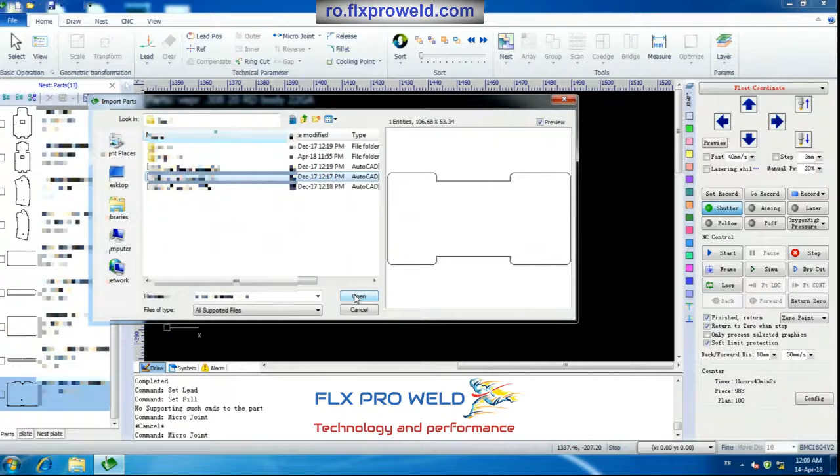So we have this part over here. That's what we want. We hit open. Now, I've already done this a bunch of times. This whole sidebar is full of components. So now we're going to right-click on our part and click Edit Parts. Now here's where we're going to start setting up the component.

So the first thing we're going to do is select whatever we want to edit. These top icons up here are only going to have effect on whatever's selected. So if you only want to do, say, certain geometry, like holes inside, you want compensated or different leads, then say outside geometry, just select what you want and then select the outside to edit that part.

So first thing we're going to go ahead and do is hit compensate. Now I'm going to show you how to calculate this in another video. Basically, you just cut a square of a known size, measure it, and then add on half the amount that it is different. I'm going to check all expand.

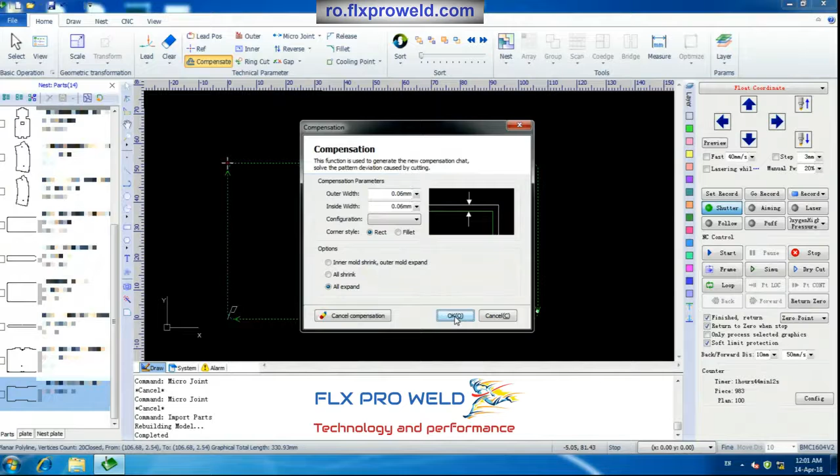You can do inner mold shrink, outer mold expand, but for certain configurations of the way I do things, that doesn't work. So I select either expand or shrink depending on what I'm doing. So outer geometry, we expand. Hit OK. And as you can see, it has now drawn a second line at an offset distance that I determined. And that white line is where the center of the laser beam is going to travel, and this is going to be the edge of what gets cut.

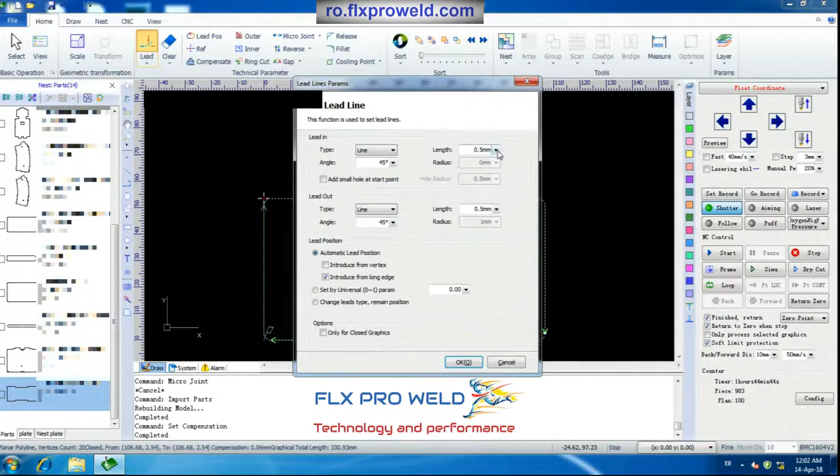So the next thing we're going to do, we're going to set up our leads. Now I got kind of this funny recipe I like. I use lead in line, 45 degree, 0.5 millimeter length, and lead out. We hit OK, and we're going to change the lead position. So that's this button here, and we're going to select right here.

Now if you look, I've got these 45 lines going out. What we're going to do is select inner. That's going to flip it. Now if you had set your compensation up to automatically find inner and outer, it would flip your compensation, which is why I tell it specifically to expand the compensation instead of letting it figure it out on its own.

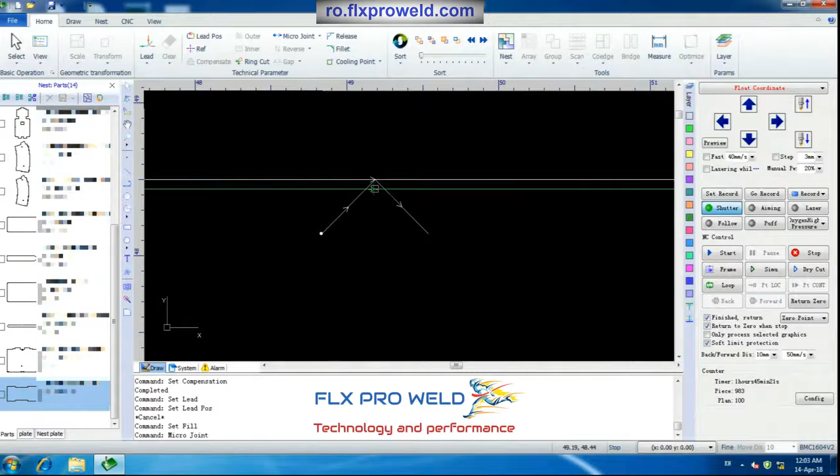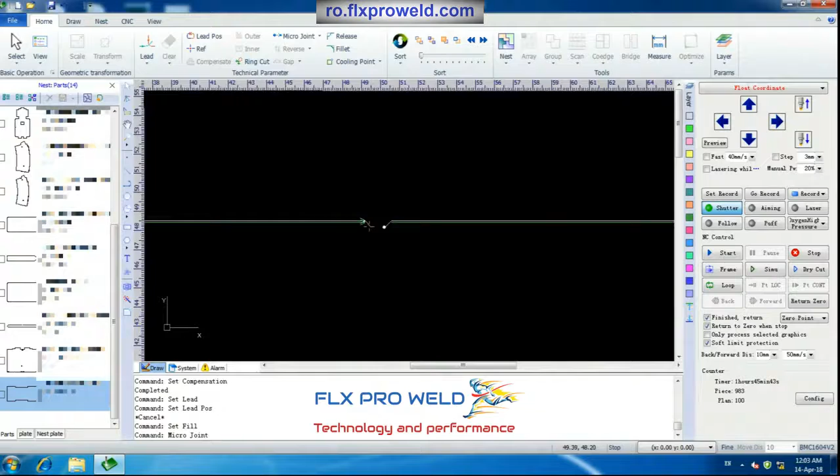Then finally we click micro joint, and for some reason it doesn't select on the white line. You got to go to the line that's your actual part, select in between these two, and I like 1.4 millimeter. Now what this is going to give you is about a 0.6 millimeter gap in between here, and it's going to start the laser inside of the part, and then it's going to end inside of the part. So it breaks off clean. Well, it's not perfect, but at least the spur isn't sticking out, which will throw off dies and tooling. Your choice on how you want to do that.

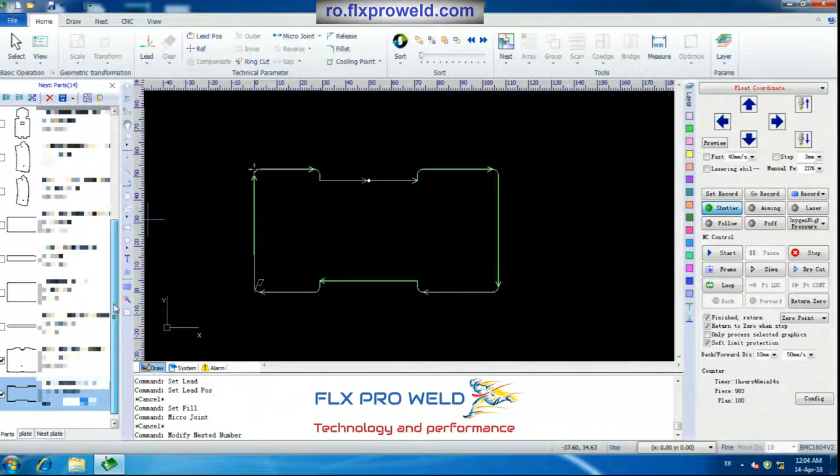But now this part is set up, so we're going to come over. We're going to select how many we want, and I want 500 of each of these parts. Check the little boxes that we want them. Alright, so after you have all of your parts, your part numbers figured out and dialed in, you can go ahead and click this button over here that looks kind of like a puzzle piece.

And you're going to go, in this case, selected parts. And I use standard plates. In my case, they're 1215 millimeter by 1215 millimeter, which works out to about 4 by 4. Plate thickness, plate material, really doesn't matter. So now we're going to look at part gap. That's the space in between the components.

3 millimeter works for me and my thin material. Plate margins 4 millimeter. That works because that's about the width of the laser dot for setting up. So it's good to have a decent margin on there. I'm letting my rotation angle be 90. You could do 45, 180, and then this is do not rotate in Chinese apparently.

90 works. 45 starts adding more potential options for how it can rotate a component, so I just like to leave it at 90. Auto optimize, I'm not actually sure what that is exactly. Remnant will cut the sheet off. Be careful with that. If you set your sheet sizes wrong, it will cut off the sheet, so be careful with that. I've used it a few times. I don't use it too much though. Usually I'll just cut it off with a pair of shears.

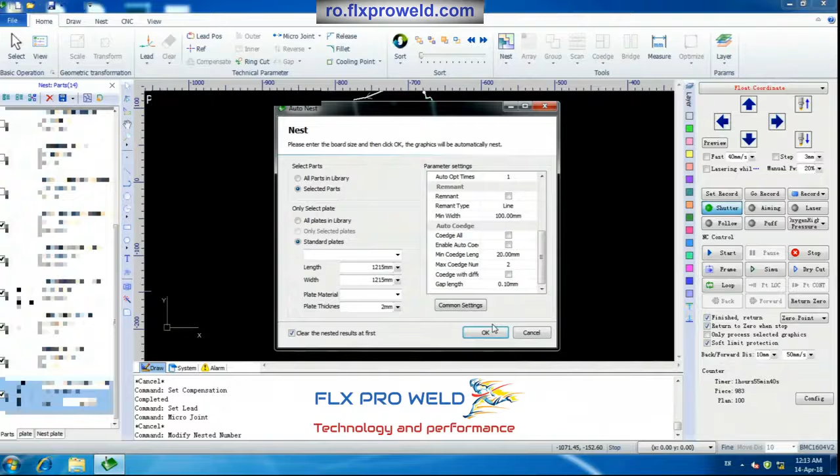Max co-edge number, but I don't have co-edge on because my parts require a high level of accuracy. If you have co-edge, it really doesn't use your compensations, so I don't like using it. You can if your parts don't need much accuracy, but then why are you running a laser? Okay, so we're gonna hit OK, and it's gonna start arranging the components onto sheets.

And so a few little notes while we're waiting. The limit on how many components you can nest is 999 per component. So if you're doing more than that, you might look into either doing batches of components or using an array copy if the part is so small that you're making that many. The other limit is you are limited to 20 sheets. That is regardless of the size of your machine. So on a little 4x4 like this one, it does start to become a little bit of a problem.

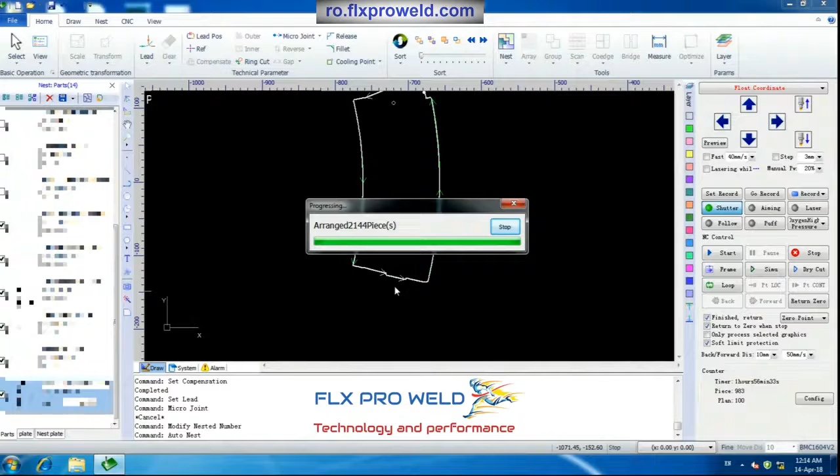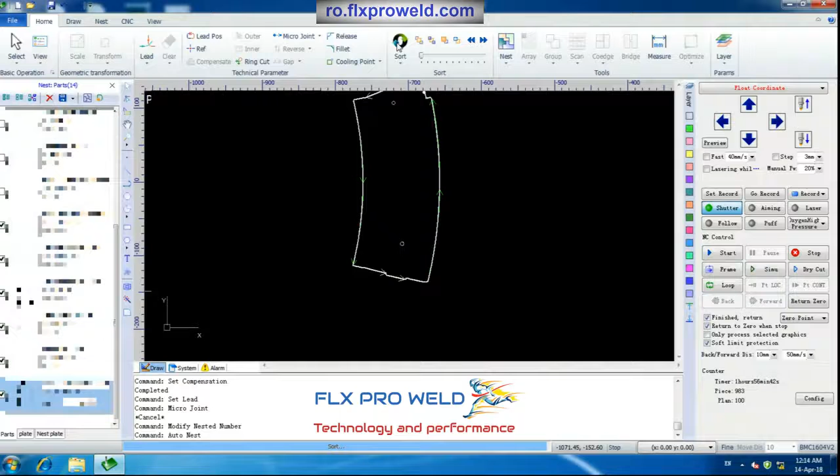Okay, 2100 pieces, 2144. That does not seem like the full number of the components I requested. So I think I hit the limit of how many parts I can do. Oh, another thing to note, that 45-degree internal cut that I did, where I told it to cut inward, if you touch the sort button, that's this button up here, it's going to flip it back the other way. It tries to save you from yourself, but that is an important thing to note because it will put all the bumps outside.

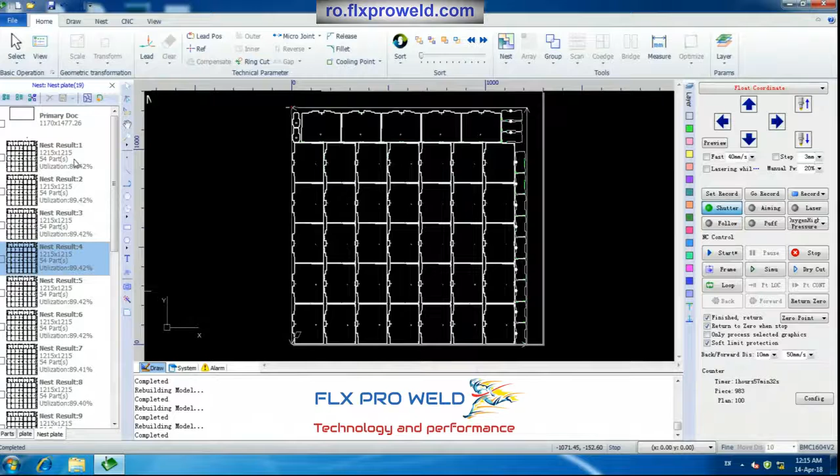Alright, hey, look at this. Okay, so nest plates. So hey, 19 sheets, that's perfect. So yeah, there we go. That is almost 90% utilization of the material, and as you can see, it only took a minute. So the other little warning I have for you guys, and we keep making this mistake, is you have to manually switch to the next sheet each time, and I have been forgetting to do that, so I end up with like 30 extra components. So let's go ahead and load up the first sheet and we'll start cutting.

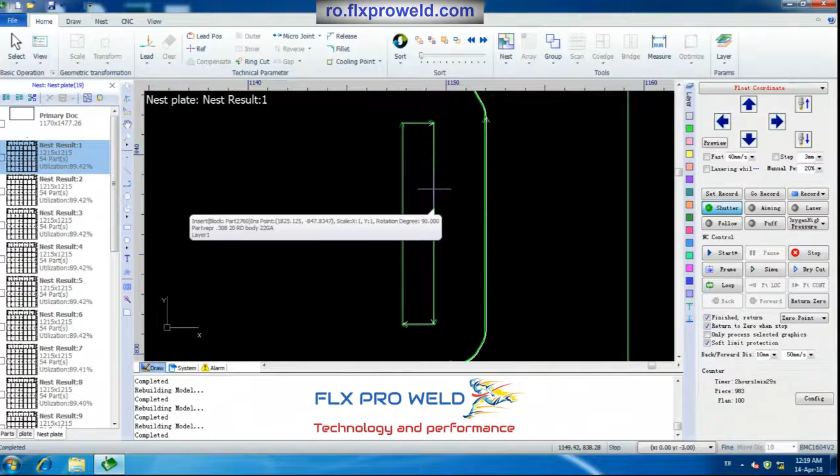Just a little mention, if you guys do really small parts, geometry like this square is only just over 1 millimeter wide, or about 50 thousandths of an inch. When it cuts around, it's going to blow out, and sometimes it hits the edge of the nozzle, which causes a capacitance error. Just something to be aware of. Your machine's not broken. It's just parts like this will really mess it up bad.

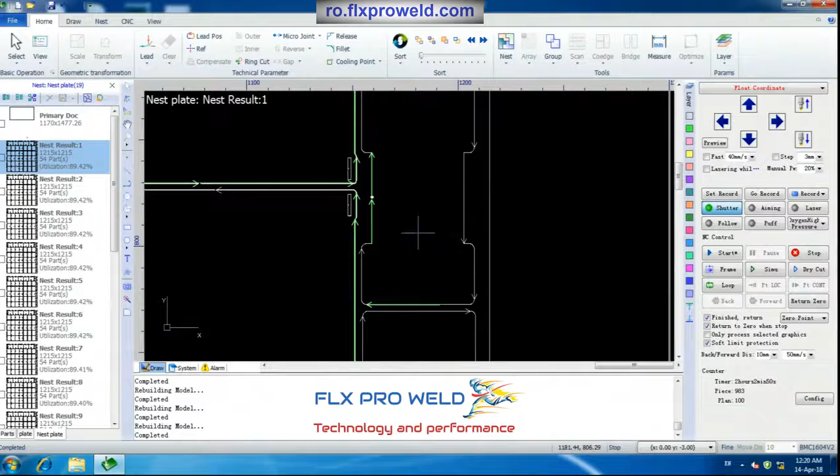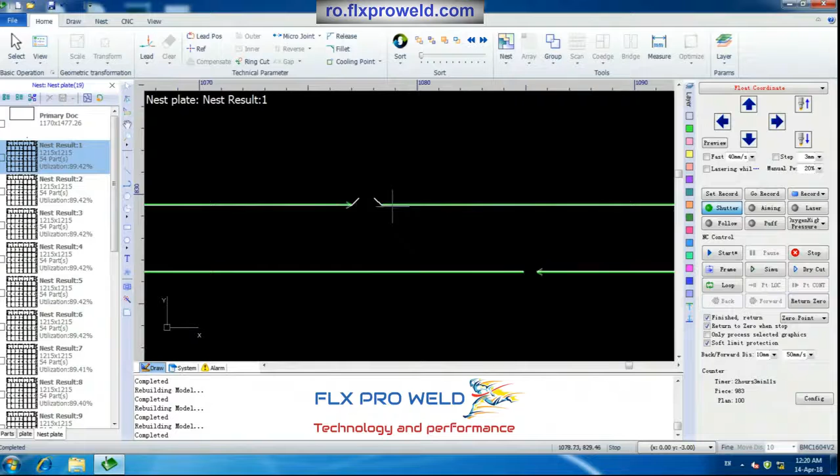Another little thing I wanted to just real quick mention. Here's a great example of how owning your own laser is a big advantage. This component right here, this kind of rectangle, actually goes through another shearing operation. Now, if I was job shopping this thing out, the job shop's not going to know that. So I know that I can leave a gouge in the side of the component, and it doesn't cause any problems because this all gets trimmed anyway at a later process. So you can do that with a lot of things. This section of this component will be buried underneath another part, so you won't ever see that notch. And that's just one of the many advantages of owning your own laser.

So we're going to go ahead. I've already set the sheet. I'm just going to hit start here instead of using the remote. And Mike is going to turn the fan on. Thank you. And we're off. And you can see live speed of the machine cutting right here. That red X is where the position of the center is. In that corner. Yeah, there usually is.

You do have a certain throwaway rate on components. You don't get 100%. You end up throwing away not a ton of parts, but a fair number of them. What, about 2% or so? But I'd say between 2 and 5% if it's running decently, depending on the complexity and your level of requirement. Capacitance error out. Yep. All right. So what we do then is we don't do anything. We just say resume, and boom, we're back to cutting again.

It does this a lot on this component. I don't think there's really a good way to fix it, so that's just what it is. Primarily it's because it's such a large square chunk that's coming out of it. Somehow it always bumps up and hits the nozzle. There's just no way around that. So, all right, we're going to turn the video

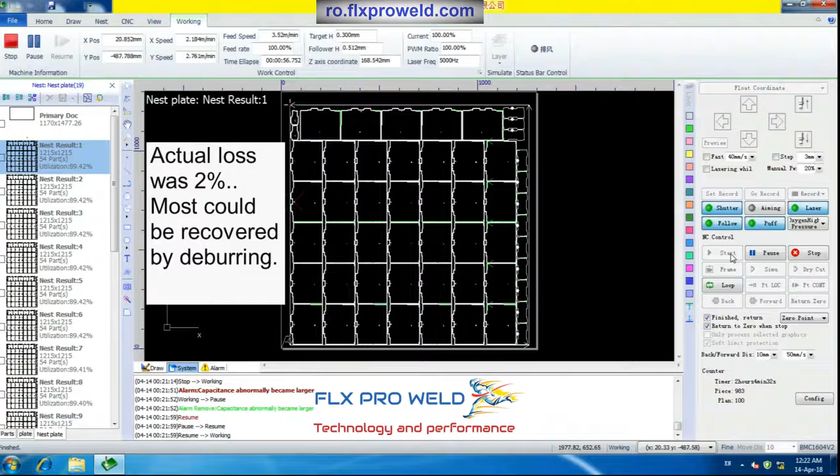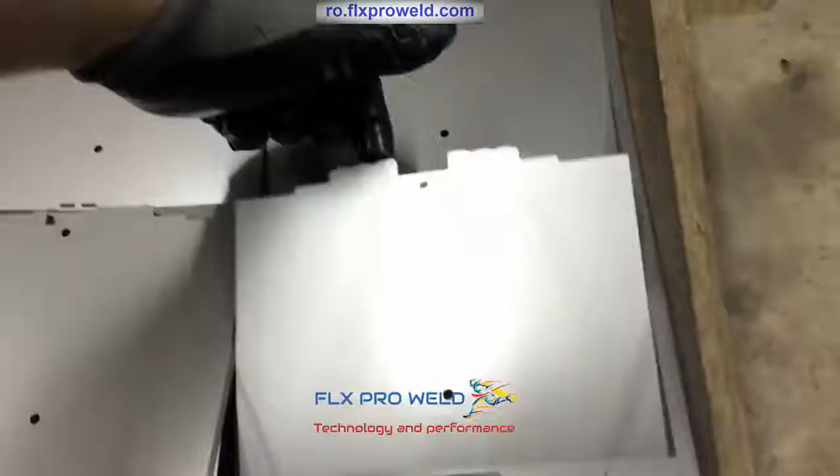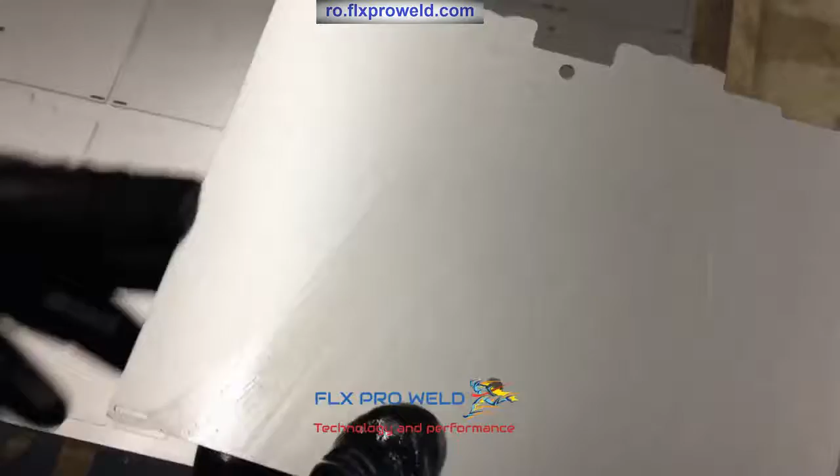off at this point. So these are the components after they came out of the laser cutter, and you can see they're hanging on. We're able to handle them and move them out of the machine. Takes a couple wiggles and the part comes out. And the edges, that little tab is more or less smooth. This one's a little bit of a bump, but this one is flat with a little nick in it. Yeah, it's almost minimal. It's very minimal.

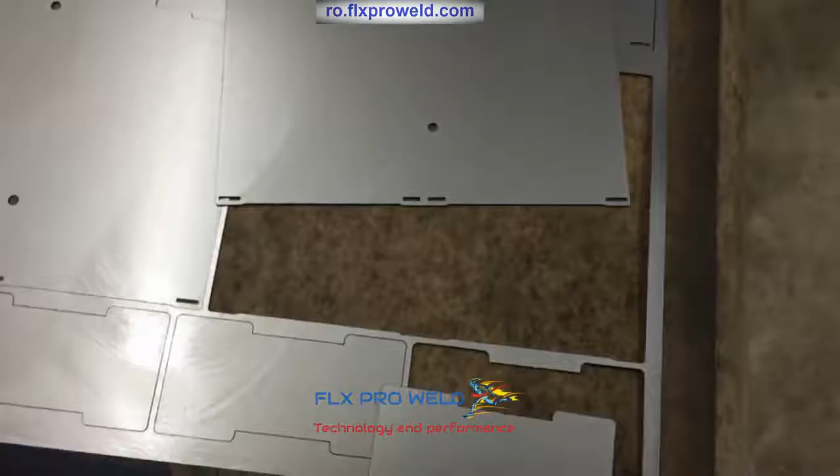And the same thing with this. There's a little nick in it, but otherwise the parts come out, and at this point what we do is we take them out onto a flat table with heavy cardboard on it. That's basically other sheets. This is 16 gauge underneath it, a stack of it, so that you can get the sheet nice and flat and wipe it down to get the cutter dust off of it. Flip it over, repeat wiping, getting the cutter dust off, and then break all the components out and stack them

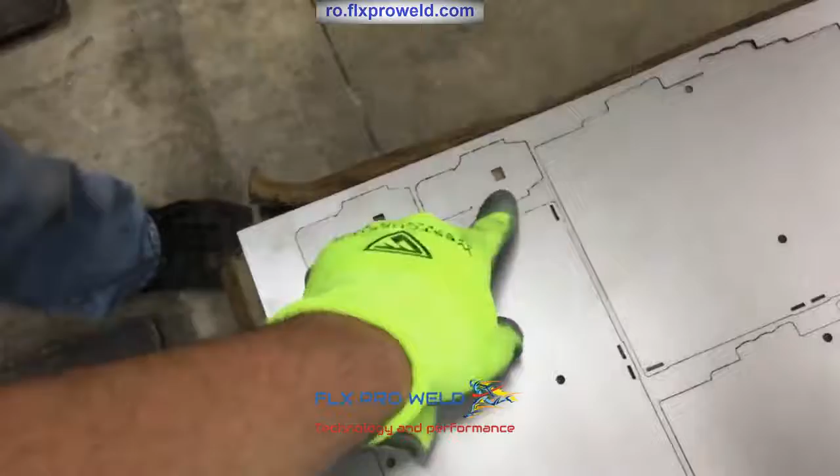on. And as you can see with the nesting software, it generally goes from largest part to smallest. So this is the biggest component that we have. So it fills the sheet as much as it can, and then it fills in the edges with the next size down that it can. And as you can see, where was it? Look through the camera. Right here, it couldn't get one of those other parts on, so it put one of these smaller pieces in.

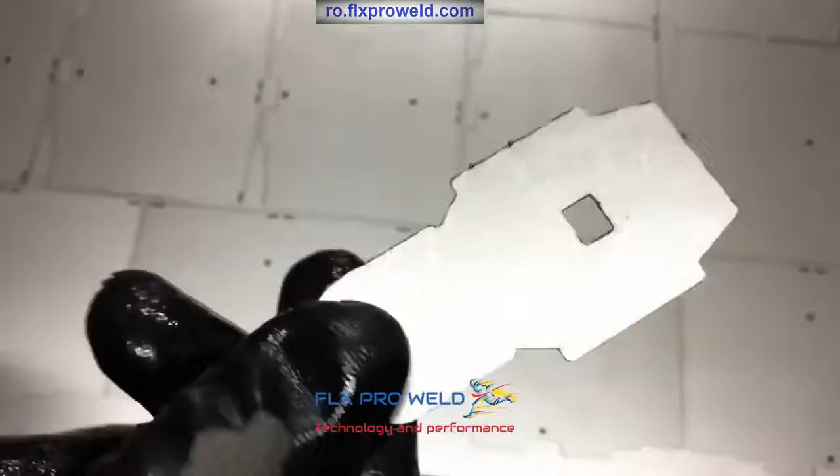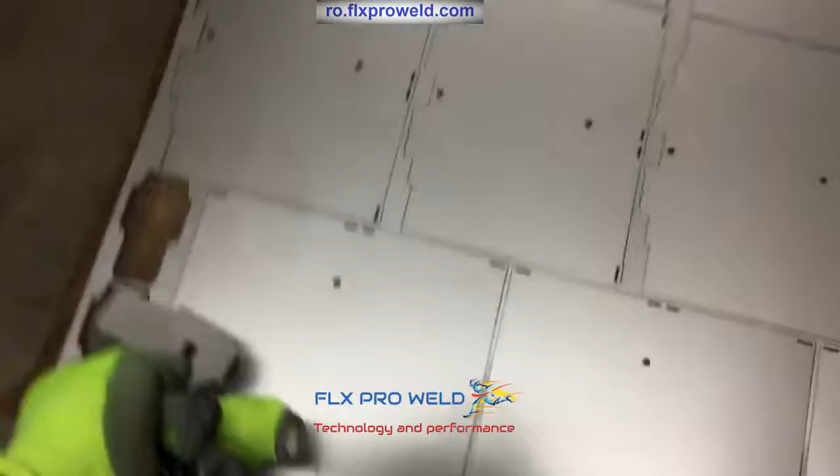And here's another little note. Even if you got your stuff dialed in really well, you should still expect occasional bad parts. This one's going to get put in the reject bin, and then we'll add it in at the end on the final sheet. Anything else? I'll just show the problem there. You can see that's not ideal. But what it is, the sheet vibrated. Nothing to do about that. It's not the laser's fault. The edge of the sheet was floating a little bit, and when you blow air on it, it starts flapping, and the machine just simply can't keep up with that. But the vast majority of the components are perfect, so that's all we really care about.

Alright, we've just finished cutting our first sheet. We've reloaded the machine with a new sheet and set its location using the remote control. Now this is very important to remember to do every time, is to click to the next sheet. If you're not sure if you've already done this or not, go ahead and click to the next one. If this stays white, it hasn't been done yet. So just keep that in mind.

As a note that I should have mentioned earlier, when you're setting up your parts, you don't set up your feed rates and your speeds in that screen. You set them up here in the nest plate area. You click layer, and it's going to be the color of your part. I only have one layer here, obviously, and this is where you set up your stuff. More on that probably in another video. You'd click load, select the material from a pre-saved list that you would make up at a different point in time.

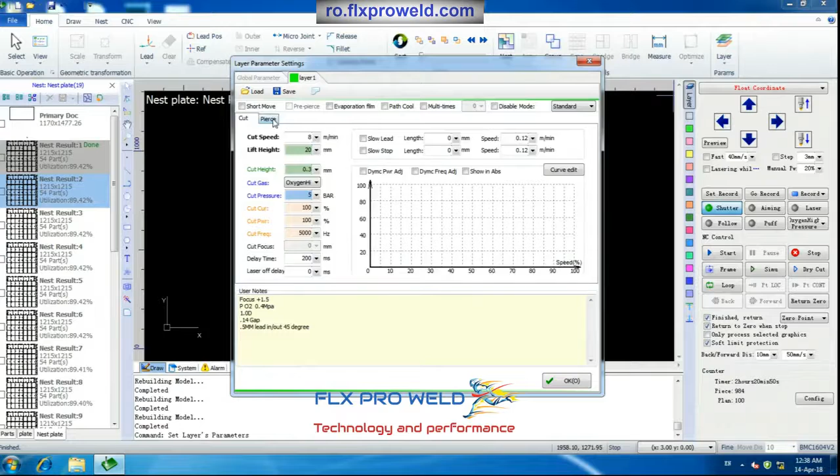Set up your focus, your air pressure. These are so I remember my gap and my 45-degree lead in, lead out with 0.5 millimeter lead. That's the one I showed you earlier. So these are my settings. No pierce, cut. Just pause the video if you want to look at it. All right. So that is where you would set that up. You'd set it up before you start cutting the first piece. I already had it set up, so that's why I didn't do it.

Okay, so now we have clicked on to nest result number 2. We are going to click the start button, and it is going to start cutting the second sheet. And then we will repeat that for all of the sheets that we make. Now, if you forget to do this, you can cut a piece as many times as you accidentally keep cutting it. So we've ended up with extra parts a few times.